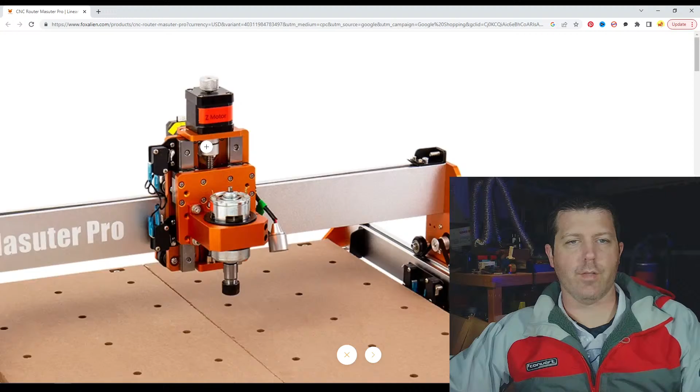So on this one here, let's see if I can zoom in. There we go. This spindle mount it comes with is for the same spindle that's in the 3018 by default, that same 60 watt 775 motor spindle. It includes that, and then you can also upgrade to a 300 watt spindle that fits right in here where this black sleeve is. Another option too is it comes with another clamp where you can mount a 65 millimeter router, like a Makita router, in there.

I think it shows it on one of these photos.

Yeah, so it includes that clamp with this kit, and of course this is a belt-driven system as opposed to the lead screw of your 3018. So it doesn't have quite the same amount of torque as a lead screw driven system, but it does have a faster speed, which is great for running a laser.

Yeah, so with that, the faster speed is more configured for a laser option as well. That's kind of the benefit of having a belt system, is that you can actually drive it a lot faster, especially when using a more high-powered laser. Now, the 3018 can still run a laser, but since you can't run it as fast, sometimes you have to run the laser at a lower speed to account for that.

So some other options along similar lines to that. Looking at the price tag here, that's $629. You can get a used X-Carve for double that, and it has larger stepper motors and a larger work area. So that's probably the other option I would go with besides this as your next step up from that. Now, FoxAlien does also sell...

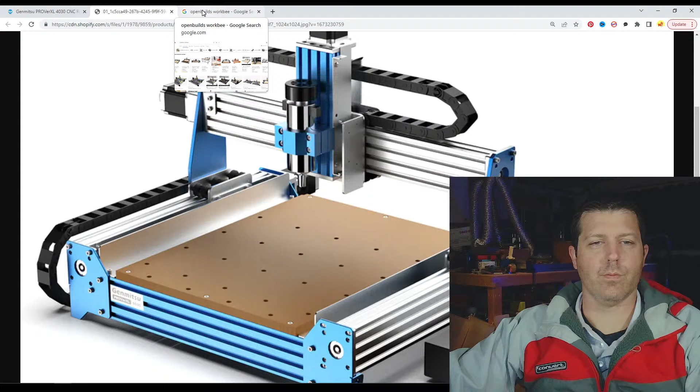X-Carve and this Shapeoko and the Long Mill. And those you can adjust the eccentric nut to pull the bottom V-wheel up into the rail as any of them wear, right?

So if we jump over here and look at the WorkBee... oops, let's try that one more time.

Over here on the WorkBee, it's a very similar design with the C-beam. Now, the thing that the WorkBee did differently in the original design, right, it's got the C-beam rotated to kind of cover up the lead screw naturally on the Y rails. But if we look at the Prover, they designed it with it rotated the wrong way so that the lead screw is kind of exposed to sawdust. So then they had to build these little channels here to help protect that.

And that's kind of one of the negatives that I don't like about the PROVerXL, is the way that these beams are rotated. Now, a neat thing I'm looking into is what it would take to give it away once I finish building it. Somebody sent me their old frame from the PROVerXL, and I've been slowly machining parts to rebuild it, to possibly give it away to somebody on one of these videos.

But that's still in the future right now. Yeah, somebody upgraded from the 4030 here to the 6060, and they just had a frame that's just sitting there that they have no use for, right?

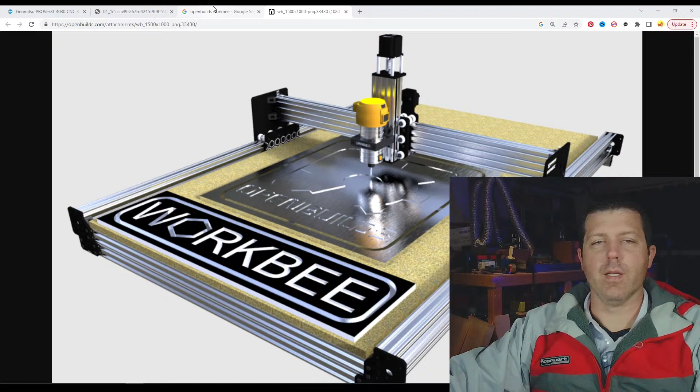So, I mean, that's a change that hopefully they make in the future, is just change the hole location there on that Masuter Pro. But yeah, they do have those.

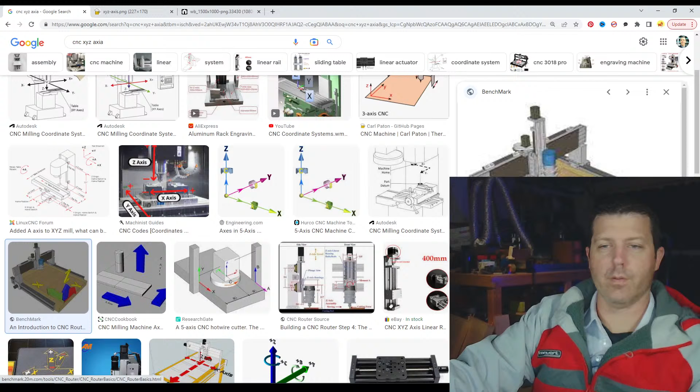So how we have X and Y here, the Bob's rotates that. So if we look at this, the Bob's is based on kind of an industrial CNC, which does use a rotated X and Y. Now on a larger industrial CNC you don't really have to worry about tiling, but a lot of times on the Bob's machines people will try to tile, and that doesn't mesh well. This is more industrial CNC, but the Bob's has this over on that corner with the positive X going this way and the Y going side to side. So if you try to tile using Easel's tile feature, it doesn't work with the Bob's.

And the problem with that, the bigger problem that I have, is that it's not hard to change. If you adjust it, you have to reflash the Grbl program onto the controller. So that's not hard to do, but he doesn't tell anybody that or how to do it. They keep it a secret of how to change it. And I don't think that part is right. So if people want to modify your product to make it better and you know exactly how to change it, why not just let them do what they want to do, you know?

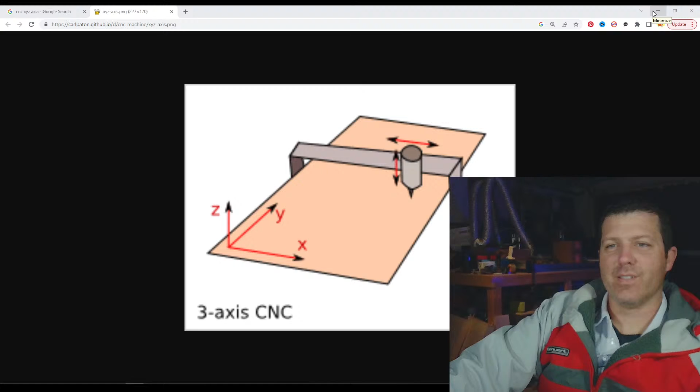Yeah Kevin, like I was saying earlier, I don't know if you caught that, but you're welcome for helping, but it's really my pleasure, man. I get so much joy out of helping other people succeed, you know? So yeah, it's my pleasure to offer the help that I do in those groups. It has become, I have taken on a little bit more than I can chew at times in those groups, but we'll jump into...

Actually we might have to go with Fusion 360 with the project that I was looking at doing. All right, here we'll go through some more questions real fast.

Roy, newbie to CNC, got a 3018 about 3 weeks ago, slowly getting to grips. It'd be nice if there was a video showing how to design something simple from CAD to CAM to G-code, with free software, that's the troubling part right there, right? So most of the free software out there is not really the best, but the best place that I suggest new users start really is Easel by far.

So you can't really get any easier than the way that Easel has it set up. And yes, they do have a paid subscription model, but they also offer the basic stuff. Although it's hard to say that VBits aren't basic, right?

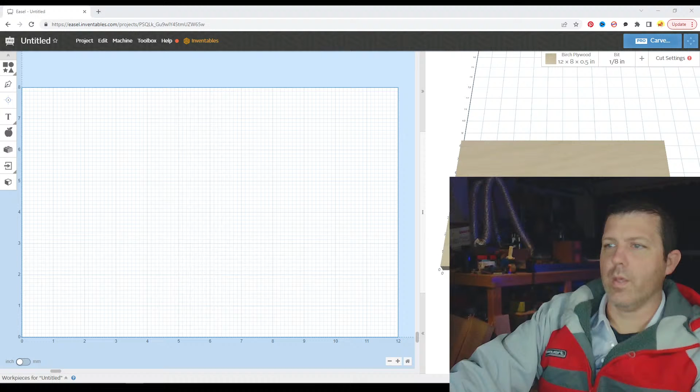Yeah, so tiling in Fusion gets a little tricky because you kind of set up the toolpath for yourself, and sometimes add dividing lines to your design in order to do it that way. But I think there's some older Popos Workshop videos that show how to manually tile before Easel released their built-in tiling method, and you basically just replicate that over in Fusion, and that's how you do it.

And it's really by taking your design, here we'll throw something out here, right? Taking your design and then kind of splitting it by throwing a dividing line through it, and then using that line to cut your design in half.

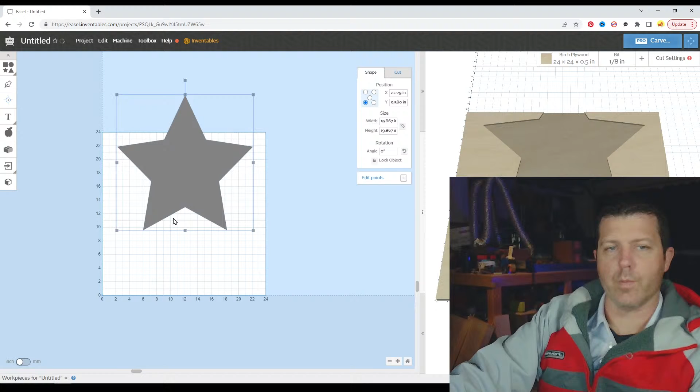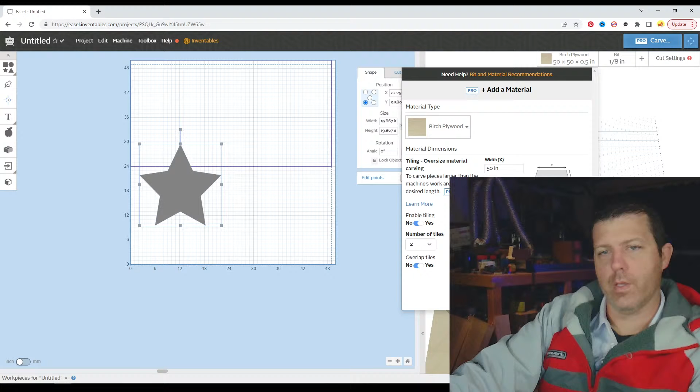Now the way that Easel does tiling by default, it actually uses some overlaps. So we can turn on tiling here... oh, we can't until I make it bigger. There we go. And it uses these overlaps, right? So it has about an inch, I'm going to say an inch, might be half an inch overlap on each of the tiles as it creates them. Yeah, 24, 25, and 26, right? So we end up with a 1 inch overlap in the middle there.

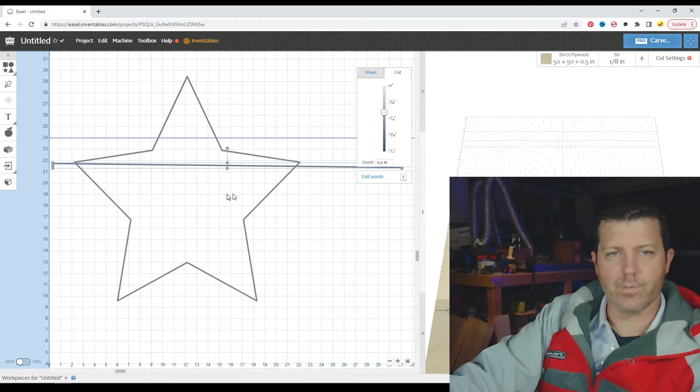You have to replicate that overlap within Fusion 360 by adding a line to your design and cutting through it. I can't really show that here because Easel doesn't support lines cutting through stuff, but over in Fusion 360 you can do that, then use the move tool to move your line up or down 1 inch, and that'll be your overlap point. You'd use that line to cut your design in half.

I can see if I can open Fusion 360, but I'm not sure how well that's going to work with the live stream going from the same computer. At least I'm not carving from it this time. I tried carving from the same computer as the live stream before, and that did not end well - too much RAM being used. I have since upgraded the RAM on this computer, but we'll give that a shot some other day.

Billy, there's a lot of people that do offer their help. The thing is, I end up in just about every group because a lot of the problems really replicate on every CNC no matter what you get. It's kind of fun when people join these groups and see people complaining and want to tuck tail and run away from that brand. But when you look at another brand, it's the exact same problems. If you think about each brand's power within the market, how many systems they're selling, and how many people post about these common problems, it's the same percentage of new owners that run into the same issues on just about every CNC.

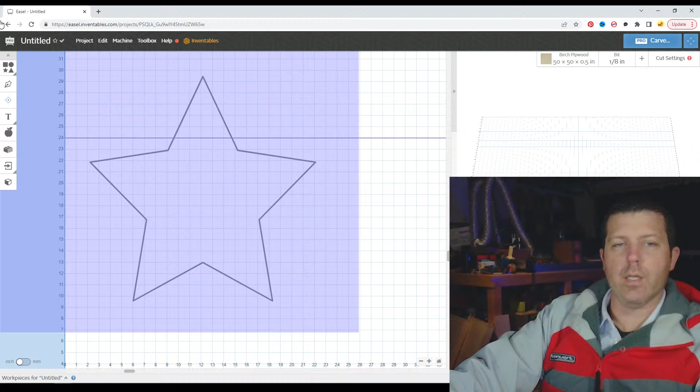Carveco is cheap, inexpensive - at $15 a month it's pretty good, cheaper than Easel. Carveco's lowest tier, Maker, doesn't have tiling built in. There's a lot of features not necessarily built into it. Well, now Easel can too, but before that, Carveco could do 3D carving, though it can't do tiling natively - you still have to do this line trick and cut your stuff up and tile it manually.

Let's delete this out. Actually, I didn't mean to hit that button again. Oh look, I have a lovely Google Chrome update. Hopefully I don't have any problems with this today. We'll undo this back to where it was.

What is your retirement present you're working on, Roy? Or that was a retirement present to you, the 3018? That's pretty fun.

Yeah, so I actually worked for a company that made remote control submarines for private and military use, and that's when I bought my 3018 CNC because we were outsourcing a lot of our parts to CNC shops. I wanted to teach myself how to do it and potentially make parts for them to undercut these other CNC shops we used. That, of course, didn't happen with the 3018, and most of the parts they were making were acetal and aluminum, which I've never really gotten into milling too much, besides a few small keychains and stuff.

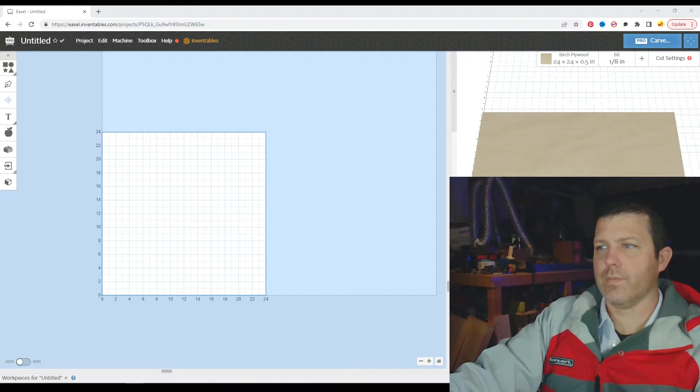Yeah, so Joe, it's really about - let me tell you a trick, since you're already here, about what I do when tiling. I've never actually tiled myself, but people have taken this advice and it works out very well because I've seen other people have problems with this particular issue. When you go to do the tile, you've got your X and Y zero down here.

Easel automates it a bit for you, but you'll have to do the same thing using Fusion 360. I would put a sacrificial board along your y-axis, like a piece of MDF, and clamp it down or screw it down so it's solid in place and not moving, then use the CNC itself to mill a flat edge on this face, where the workpiece is going to butt up against.

So then you've got a flat edge that's perfectly parallel to your y-axis, and you can butt your workpiece up against it. Then you come down here, and when you set X and Y zeros, you can jog your bit over a little bit and apply a piece of blue tape or mark it with a pencil exactly where your 0,0 spot is. So you do your first carve, and you need to slide it down 20 inches to that 20-inch point of your workpiece, which becomes 0.

So how do you identify 20 inches? You could measure with a tape measure, but what if your tape measure isn't the same calibration as your CNC? Your CNC isn't calibrated to that exact tape measure. So instead, I would jog the CNC down 20 inches, and now where that bit's at is the 20-inch point. Mark the workpiece right there, apply a piece of blue tape or mark it with a pencil, something you can erase, and you've got your distance perfect.

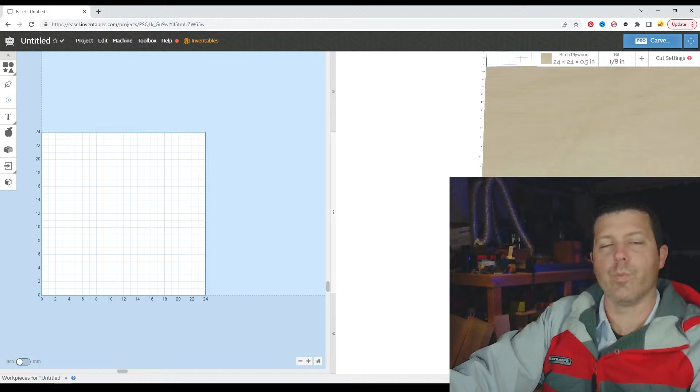Then you slide that marked point down to the 0 point of that side board you've got there, and that's going to give you the perfect alignment for sliding your workpiece down. That's really what I would do for tiling to make sure the alignment is right, because that's what most people manage to mess up on.

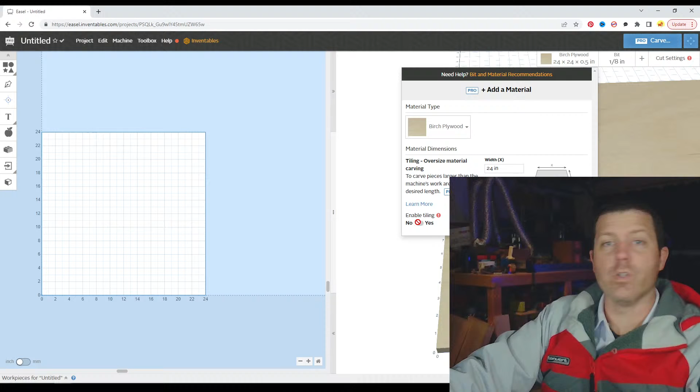Now the other thing is, depending on what you're carving with the tiling, you can set the different tiling amounts in here, the different lengths. So even if tiling wants to do just 2 tiles, you could make it do 3, 4, or 5.

Because that is one good way to end up with alignment issues that are visible.

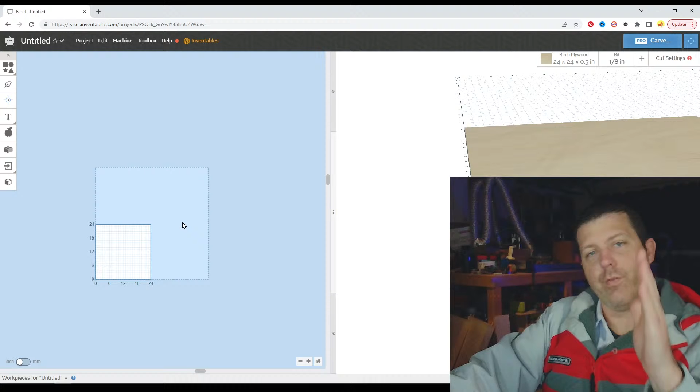Whereas if your alignment and sliding was slightly off, and you split the letters so the gap falls in the dividing piece of the tile, nobody's really going to notice that it was 1/8 of an inch off. But if you're 1/8 of an inch off in the middle of a letter, especially one that's not perfectly vertical, like a V or something with an angle to it, and your tile is off, it's going to cause it not to align right.

Hey, what are you doing up, James? Isn't it like what time is it there, 8 o'clock at night? Oh, I guess there's 2 of you here from the UK, right, James and Craig.

Yeah, exactly, use the CNC itself to mark the points.

9 o'clock, that's what, 21:30, that's, yeah, 9:30. My timing wasn't too off, my guess there.

Yeah, so exactly, Craig, using the CNC itself at least to do the measurement, maybe not to actually mark the board with the bit, but at least to give you the alignment point.

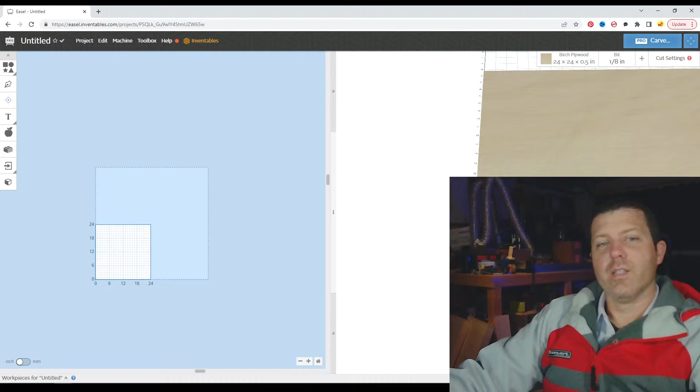Oh, that's neat to replicate the house they're living in for a dollhouse. Seems like a bit of work to do, and all the furniture too. Yeah, that's a lot of work. You'll have fun doing that while you're retired, right? Finland, oh my gosh. So yeah, I actually kind of work your guys' hours. I am coming up home and taking my kids to school in the morning, and then here I am now. Well, they're all at school.

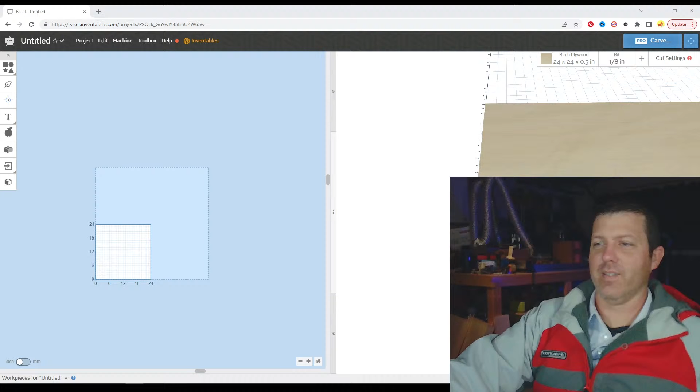Let's go ahead and see if we can pull up Fusion 360 without crashing this computer. I didn't realize that half of that stuff I was trying to show you was actually covered up by my photo too. I'm sorry about that, guys. Hopefully you understood what I was saying.

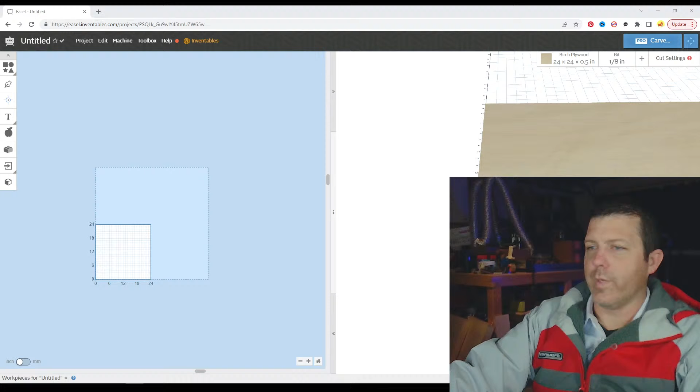Oh, inlays, that's the other thing. So Craig, we were talking a little bit about, I use Easel a lot because it's easy to use and it's easy for other people to grasp, right? Brand new users really grasp onto it. But one of the things that it lacks is being able to do V-bit inlays.

We'll do it there so I know that you can see what I can see. Oh, there we go, that might work better.

So Carveco can do V-bit inlays a lot more easily. Now it does still take a few tricks to get it to work right in Carveco, but over in the Carveco group we've got a handful of people that are really knowledgeable about that. Let's change that over like that.

And we'll see if Fusion 360 loads up. Still taking a minute to think about it. Luckily I have an educator's license too in Fusion 360 still, so there's a few extra features that I have in there. I'll have to make sure that if I show you guys anything, that they're part of the free version too.

Sitting down with a drink. You drinking beer? Man, I haven't had a beer in like 5 years probably. Not that there's anything wrong with that, or that I had a problem to need to stop, but I just haven't had to. I managed to put on quite a few pounds during COVID, and now I've been hitting the gym trying to take care of that.

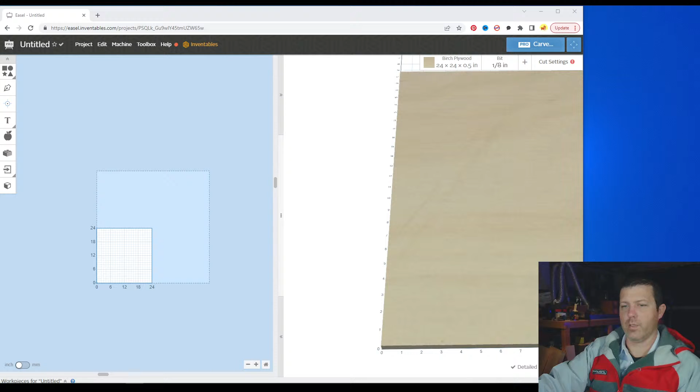Anyway, so beer wouldn't be helping me with that endeavor. So here we can jump into Fusion 360 and we can kind of talk about tiling real fast. Let's close that music out actually.

Oh, we can design from scratch, I guess. But have you used Fusion before at all? I can kind of show you what's going on there. One of the first things that I suggest doing, hey Timber, is over in the CAM software we need to set up a machine. You don't necessarily have to do it, but it does save one critical step. If you don't, you have to modify your G code afterwards depending on what sender you're using, because it'll have a tool change built in. So I like to set up a custom machine in there.

So you've never used Fusion 360, so we can come in here and create a sketch, that's the first thing really. It's kind of laid out that you use these modules here top to bottom, and typically you work left to right along the top here. I suggest that you check out Lars Christensen on YouTube.

He's got great videos, although he hasn't produced any in about a year and a half. He's on the Fusion 360 team over at Autodesk, and was for years. I guess at some point he transferred to a different department and stopped making the videos, but then he transferred back, made them for a couple months, and then stopped again. So I don't really know. Maybe it's something to do with their business there that they don't want him doing it on his own account.

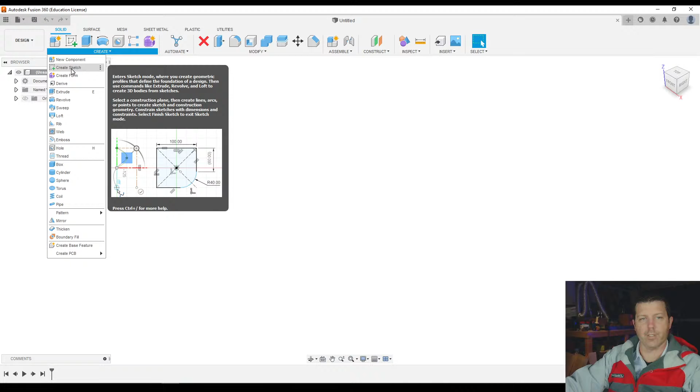But his videos are still, even though they're a couple of years old, very applicable. So we come over here and we can create a sketch using this little button, or go to create a new sketch. There are all these other options down here, but we're working from the top left, down and to the right. So you basically create a sketch, choose which plane you want it on, and this plane selection correlates to this square as well. Since in CNC we usually carve from the top down, I'm going to select that bottom plane, which rotated our box, and now we're looking at our board from the top down.

I'm going to scan through this real quick. I'm not actually going to design something with you because I'm a little tight on time, but I'll go through a few things here.

So you get in this sketch area and you can decide what your document settings are going to be, whether they're metric or imperial. A lot of this stuff you can double click on, or there's a pop out with intuitive things where options pop up with explanations of what they are. And you select what unit you want to use here.

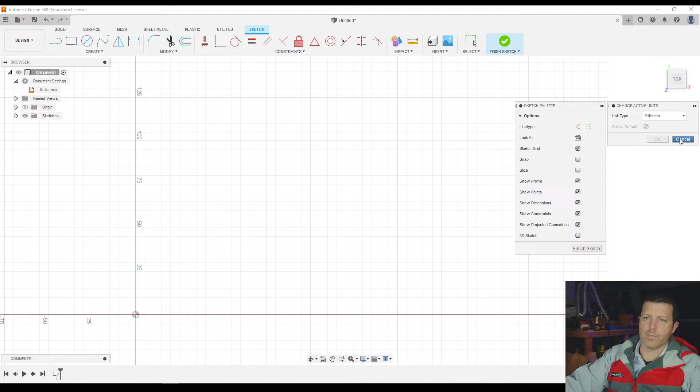Let's work in millimeters. And I'm going to throw a rectangle in just for fun. When we do that, it pops up with the dimensions and we can type something in. So we have a 200 by 50 millimeter rectangle already.

Let's say I know what the dimension is in imperial though. You can easily do your math in here. So we know imperial is a 25.4 multiplier, so we do 25.4 times 2, and that's 2 inches, aka 50.8 millimeters. You can do a multiplier directly inside there, which is kind of neat that you can do that within that tool. Once you do, you can go ahead and sketch stuff out here.

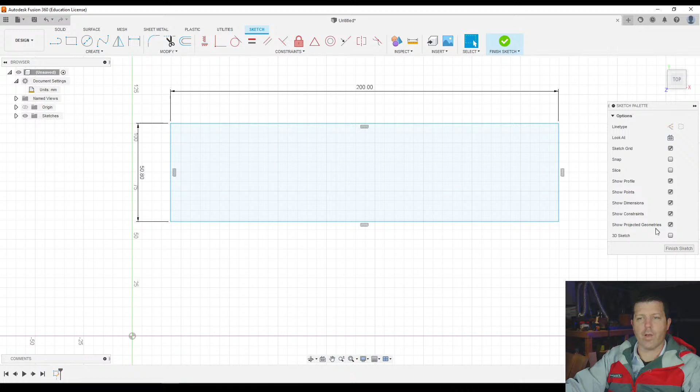I'm going to finish this sketch and we'll move on to the next step. For the most part, a lot of CNC work, if you're making signs and whatnot, you can just make a two-dimensional sketch and then carve using the perimeter. I can drop this into the manufacturing tool and create a tool path around the outside to cut this rectangle out.

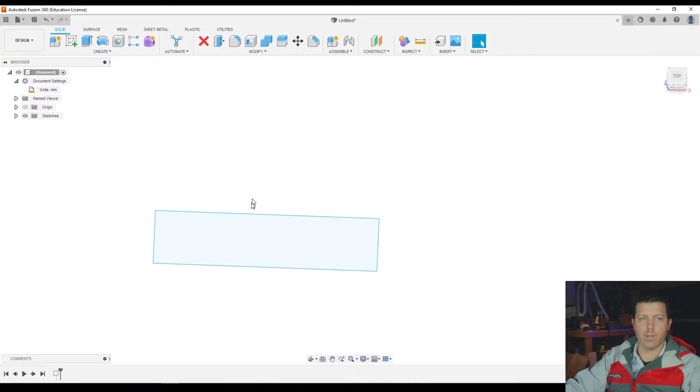Or you can make it an actual 3D model by selecting the face now and extruding it. You can grab it and move it up, or you can type in the dimensions. So this is 18 millimeter thick wood that we're going to cut here. You can give it that dimension, but you don't have to, again, unless you're designing something that really needs to be 3D.

All right, take care, James. Thanks for checking in, I appreciate it.

Let's go over here and grab one of my previous designs, and we'll pull that in real fast. Ooh, maybe we can't. Let's see here.

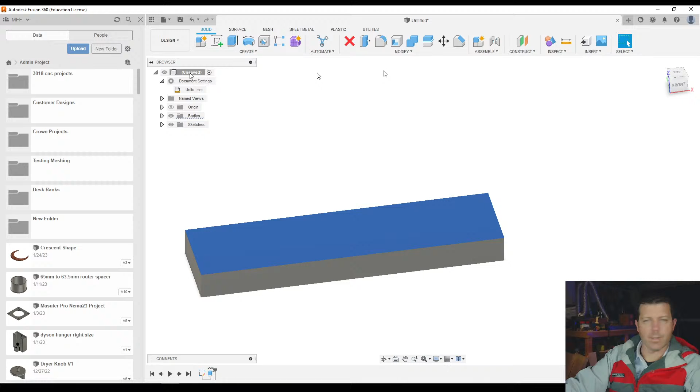So there's some designs in here that are actually work related, so I'm going to pull it over to a different window real quick and pull this in. All right, it's coming up now.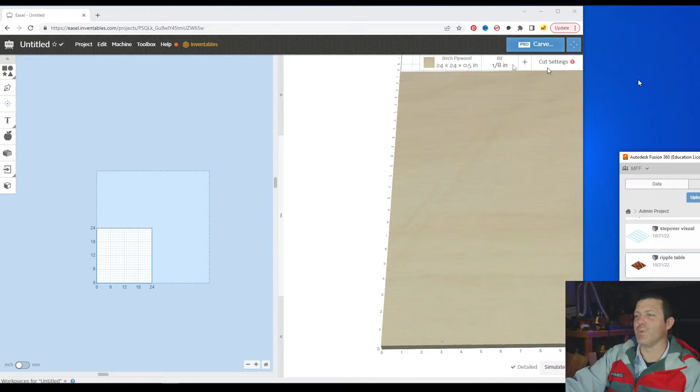Using some of the lofting tools that are within the 3D module in here, which are a little bit more advanced techniques than the tools that are in there. But the Fusion 360 group is really great as well. There's a guy in there who calls himself Swami, who helps a ton of people. I would say that he is the Fusion 360 version of what I try to do for Easel users.

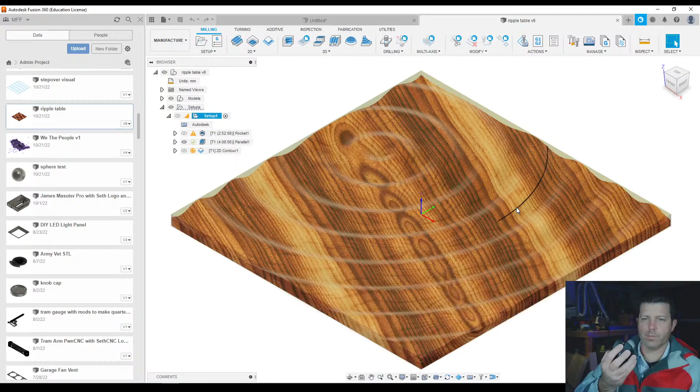And again, using your mouse here, I'm using the scroll wheel of the mouse and rolling the wheel in and out, and you can just easily zoom. And then using the shift button and mouse clicking with the center of the mouse, I'm pressing shift, then clicking the mouse wheel and dragging it around, and you can rotate the model very easily.

Now if you don't know these hotkeys, the other way to do that is called orbit. You'd have to go in here and click that in order to do it. And in order to zoom in and out, you have to use the magnifying glass here. So that can get annoying doing all these extra clicks, so using the mouse to do this sort of stuff makes it go a lot faster.

And it is extremely similar to the way that you can move the 3D preview around over an Easel too. So this is a ripple effect table, so of course this had to be done more three-dimensionally. In order to carve this, it's going to be very similar to, almost identical to carving the STL over an Easel, if you haven't seen that.

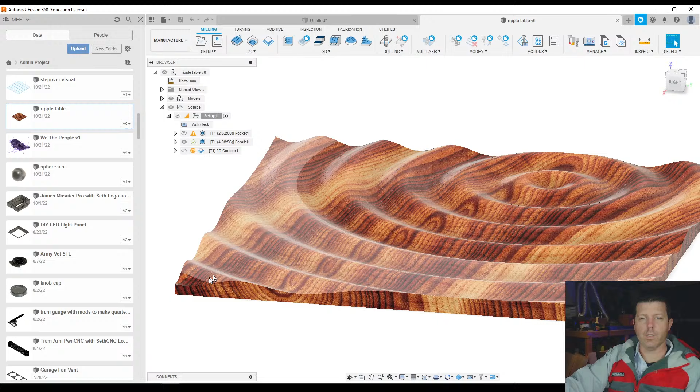I've also got a video showing how to carve STLs in Fusion 360, and that's basically the same approach I'm going to use to carve this. It's basically a sine wave sliced through this, using that as a center point and working its way out, then rotating it around that center point.

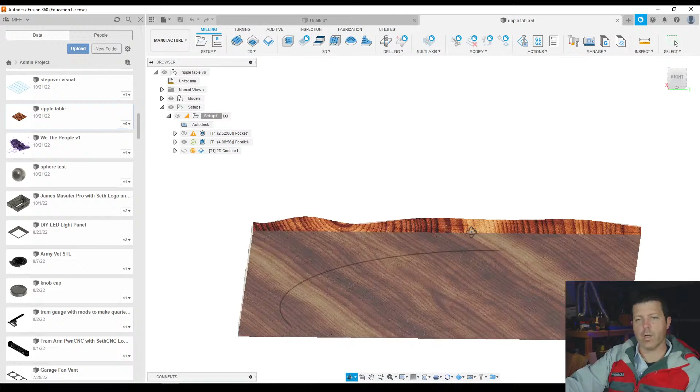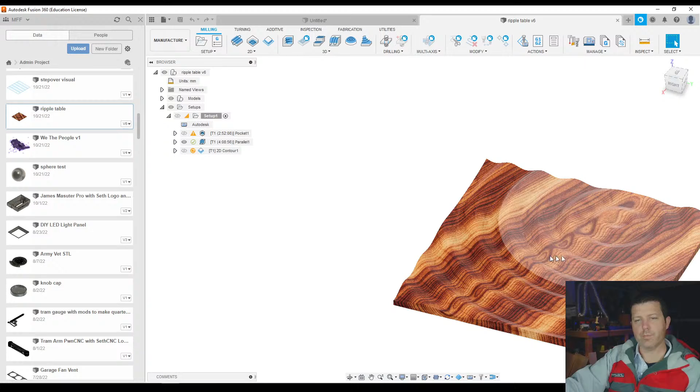Once I carve it, since I made it a sine wave, the tops are all the same height, and I can put a piece of glass right on top, maybe with a few rubber feet on some high points near the edges to keep the glass from moving. The idea is when I cut it, I made sure there were no super high points at the corners so they don't break off during the carve.

Anyway, we can go to a different design too real fast.

I've got another video that walks you through how to make a very basic sign in Fusion 360 and also do the toolpaths. In that one, to make it look and make a bit more sense, once you have the sketch made, you can extrude it to different thicknesses. I went ahead and extruded it in that video before making the toolpaths, which does help with that situation.

That video also talks about how to do the machine setup, because if you don't set up a machine, when you save the G-code it has a line for an automatic tool changer. But most of us don't have one, unless your machine is more than $15,000 to $20,000, you're probably not rocking an automatic tool changer. Except for that one guy in the SethCNC group, he's got one on his 3018, which is pretty neat.

Let's see if I can find another model here to bring in that.

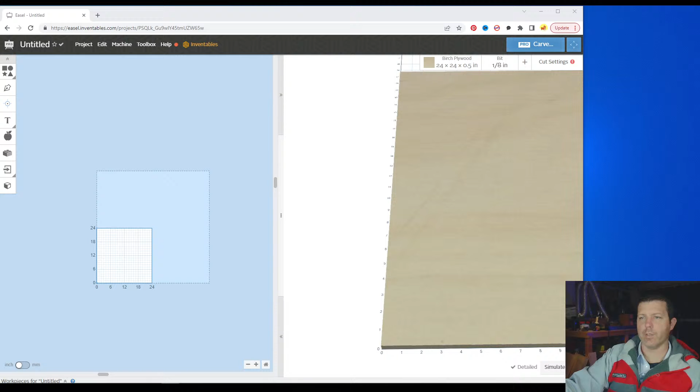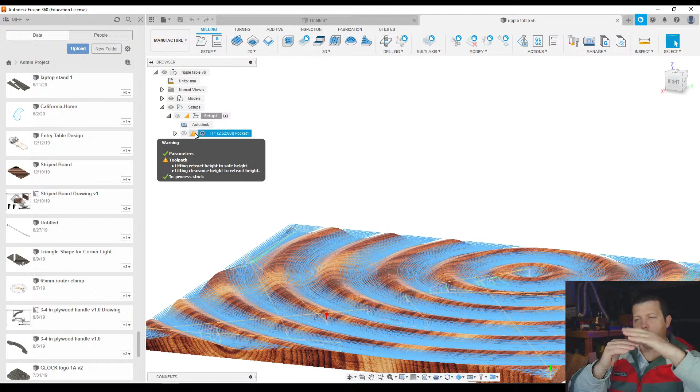I set them up wrong in this toolpath. Basically your safe height needs to be here, and your retract height and safe height and clearance height need to be on certain levels. If I didn't type them in right, it gives you a warning, but it offers to fix it for you and proceeds out.

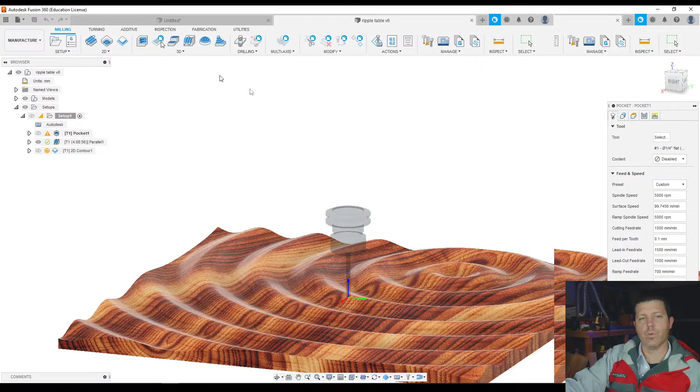There are other times where you get a red exclamation point and it fails to calculate. So if you were to go through all these steps for setting up the toolpaths, assigning the tool, setting everything up, changing a bunch of settings, then press OK, and it fails - how do you know which one you changed that caused it to fail?

So I like to open it up, assign a tool, especially in the beginning, press OK, and let it calculate without an issue. Go through tab by tab, change a few things as you learn what the different settings mean, and as you make one, two, or three changes, click OK and let it calculate out. That way you can find where the fault is if you end up changing something that caused a conflict, a failure to calculate because you put the wrong values in.

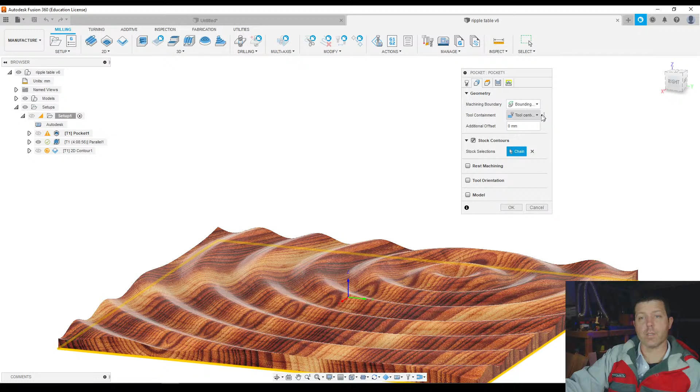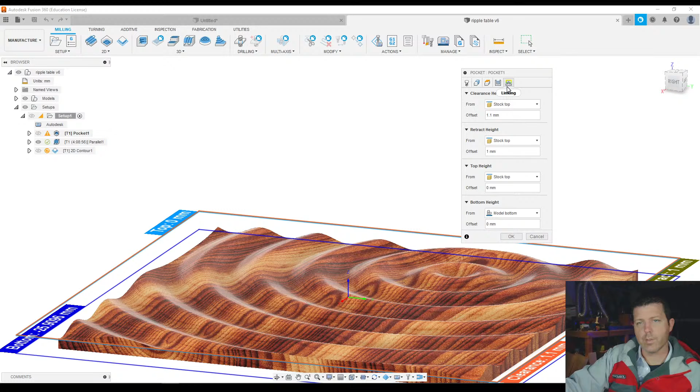Where are we at here for heights? What was the warning? Lifting retract to safe, and lifting clearance to retract. So clearance needs to be as high as... I think the safe height is over here, right under safe distance, 2.2. So the retract needs to be at least the same as that.

So if I do... why does it not like that? Here, I hover over it and it tells me: warning, safe distance is not greater than the maximum step down. So it wants my safe distance to be more than the step down that's set for the ramping here.

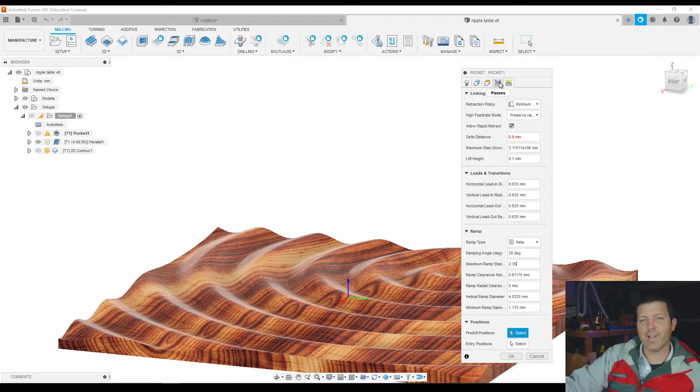Think that'll fix it. That might be the wrong step down that it's referring to though. You'd have to go through, and I forget where the others do. Let's see if we can find it real fast. Step over, diameter, step over, max roughing step down. There we go.

I kind of wanted it at 0.3 though, right? What it was a second ago. At that 2.35, yeah. So we can go ahead and change the safe height to be greater than that, and then also change the rest of those as well, right? So we've got 2.2. We'll just change the retract height to be 2.2, and then the stock top just needs to be equal or greater than that.

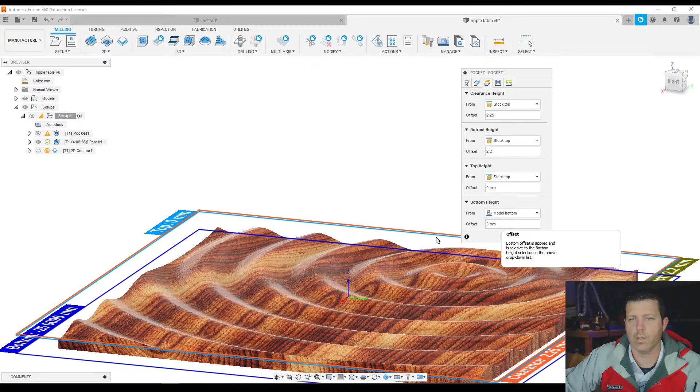And now that warning should go away. Oh yeah, that model was generated like a month ago, and Fusion has updated since then. So we got a warning there. Anyway,

Yeah, you got to get up at 4:30, and it's already 9, right? So yeah, take care, have a good night, man. I appreciate you stopping by as well, you know? I actually have about 10 minutes left too before I have to get out of here. So we'll wrap this up with this.

And a few other things that I do have on the list over there to go over very soon is V-bit inlays. So maybe we'll save V-bit inlays for next week, and I'll rock through a V-bit inlay using Carveco, and we'll just do the computer setup on here for that.

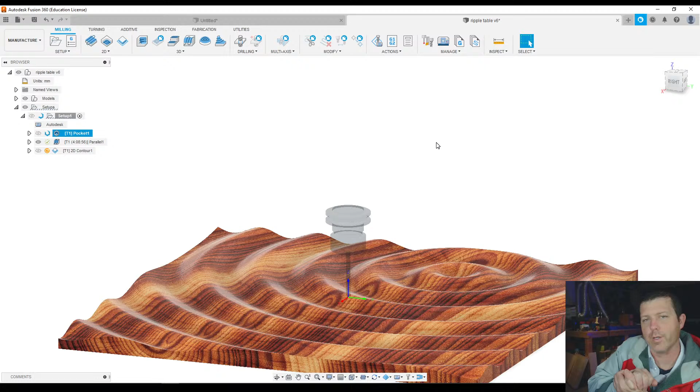Timber, yeah, so the sine wave, I did design in Fusion 360. Oh yeah, we can jump into that real fast.

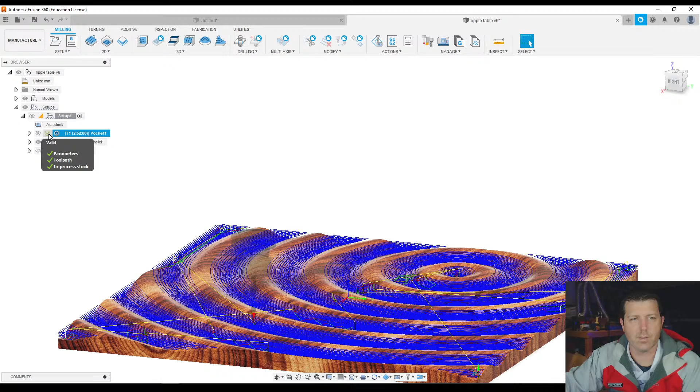So yeah, you can see here that everything is all checked off now. I fixed that toolpath and the layers, right? So we can jump over here, back over the design tool, and like I said, I've got a few more minutes before I've got to go get more kids, so we can jump into that real fast. We'll hide the body and sketch one, yeah.

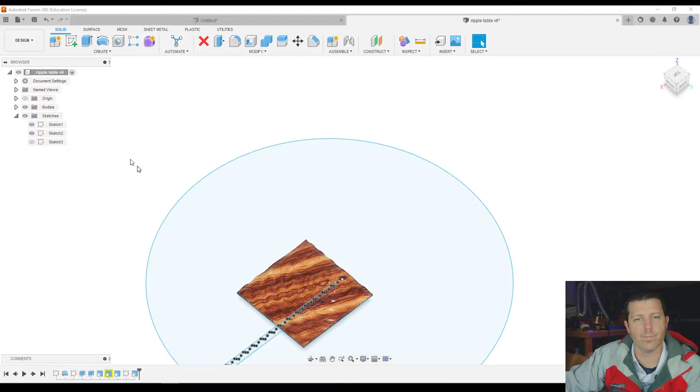So I just used an arc sequence here to design a sine wave. And then I did the bottom half of the table and the top part that I was going to cut away of the table, and then I rotated it. Rotated that sine wave about this circle to give me the... might be hard to see with the way that this wood is sitting there, but you can see this center point there, which is the edge of this rectangle, that I rotated it about that center point to create the radius, right? The ripple effect.

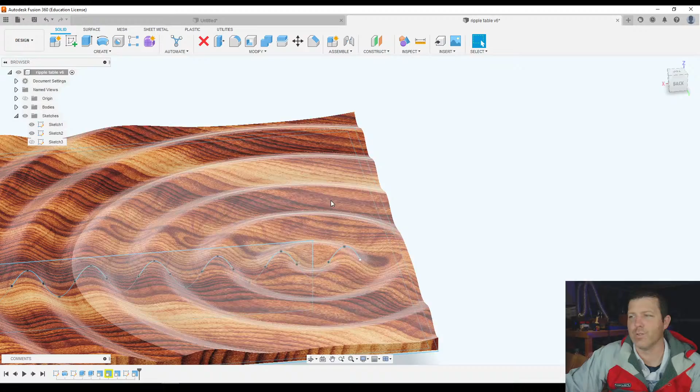I was considering also doing another carve that sits on top of the table of like a water droplet falling into the water, which I haven't really ironed out exactly what I want to take this project to, but that's basically how I did it. I made this ripple effect using an arc, a repeating arc.

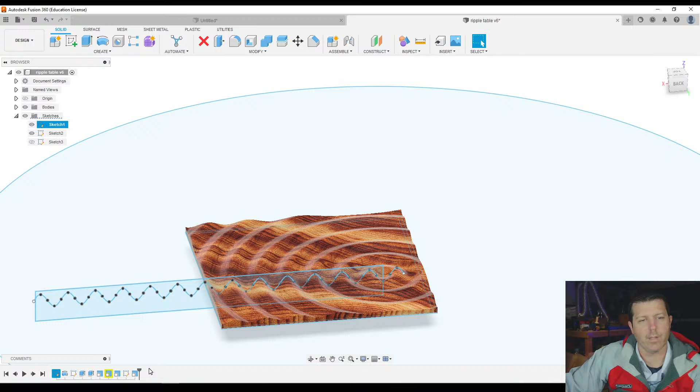And I want to say it was, let me jump in here real fast. And we can jump back to this part of the timeline. Ooh, now you're gonna make me figure out how I did it to begin with, because there's a few ways to do this, but I want to say that within this sketch tool, we'll just create a new sketch to do this.

Oh, I need to select my plane there. That's what the model's in the way. I didn't even notice that.

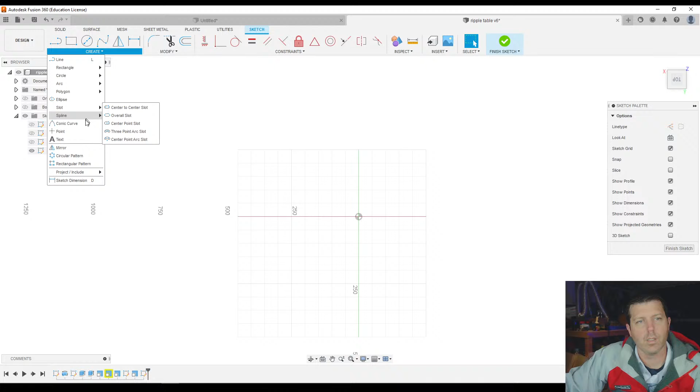And in order to do that ripple effect, we'll just hide the rest of these real fast. So you could use this fit point spline. I believe that I used one of these. Yeah, I used a conic curve, and then, oh no, yeah, fit point spline. And I used a known location here, like zeros, went through and made another point, and

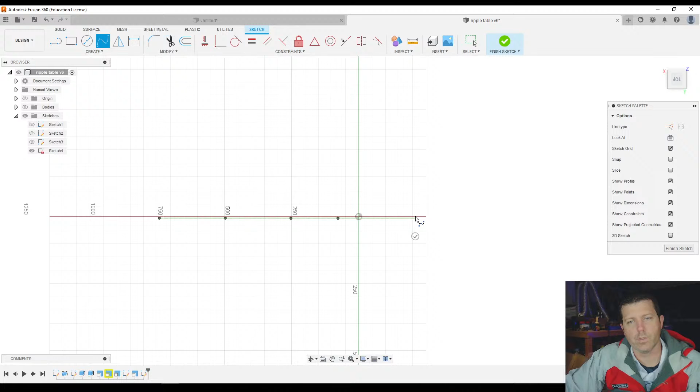without pressing escape this time. And separate them out a certain distance, right? For the sine wave, they're going to be equidistant apart anyway, right? So once you set those distances, you could then take your wave here and adjust it up or down.

I'm going to go ahead and press delete on these to get rid of that part. And I spaced out the points like that to give me the sine, all perfectly spaced out, just by grabbing one and lifting it the exact same distance as the other one over here.

Now it does something with the way this is set up with the first and last node. You see here the arc amount is different than the arc amount here. It has to do with the way it wants to throw these in there. So if you look at the original design, I kind of left the first one, and the last one ended up good. But for some reason it messed up the first one, and I threw that one away basically, if you look at it.

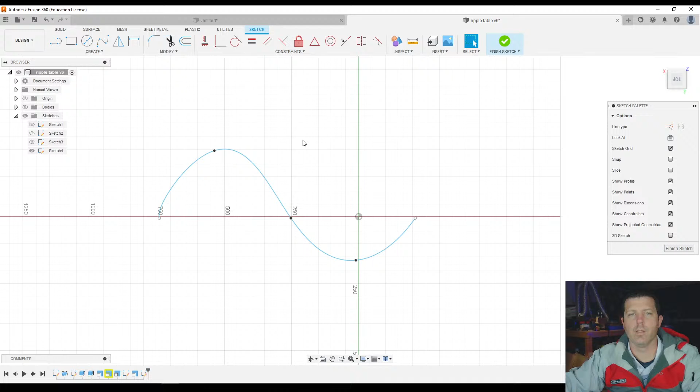The ripples could cross each other, that'd be like having two different duplicates of the same thing with two different cutaways. Yeah, that'd be pretty neat.

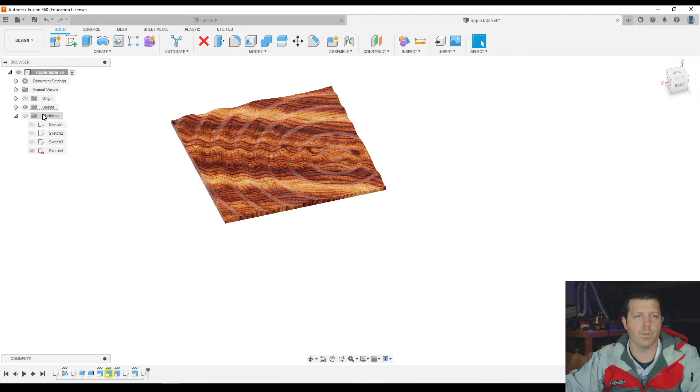Here, we'll jump back over there real fast. Because even then, once the body's done now, right, we can actually just use the body itself to create - like I could rotate, I could duplicate this and move it over, and then use a body to cut the other body. We'll do that real fast.

Let's see if I can kind of get what I think you're suggesting doing, right? I'll paste a new body right there, and we're going to move it. Oh, it's the same size, so all I can really do is rotate it.

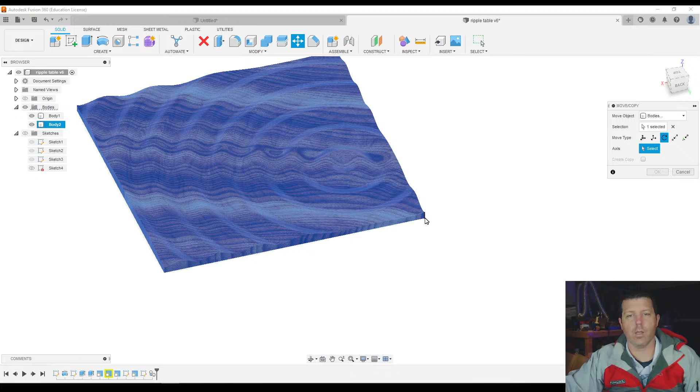We'll rotate it about this axis. I don't know. Yeah, let's go the full 180. And then we'll move point to point, that bottom corner to that corner.

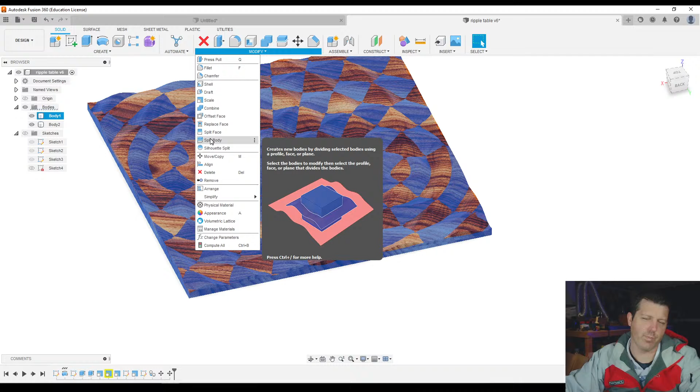And now it kind of forms like a weird checkerboard-ish pattern, right? So I could take this body and then use this - not combine. It is split body, yeah. Or is it combine? Now you guys are making me forget how to do this stuff. Yeah, combine, but we use the cut operation, and our second tool body is this other body.

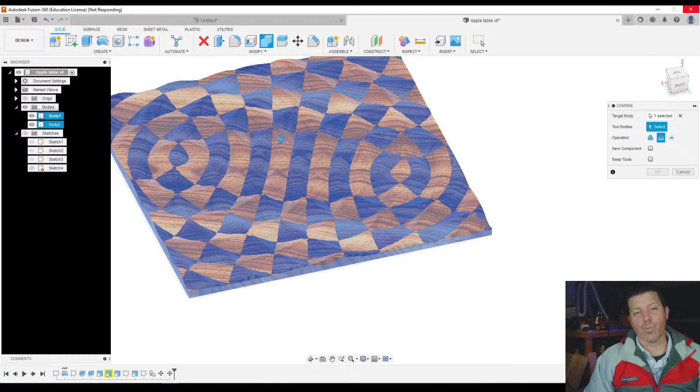It's going to take a second to select it and do its math here, because it's going to want to preview it too right now. Ooh, we'll see if that just forced Fusion to crash. All right, we're good. And we can use that tool to cut it with, right?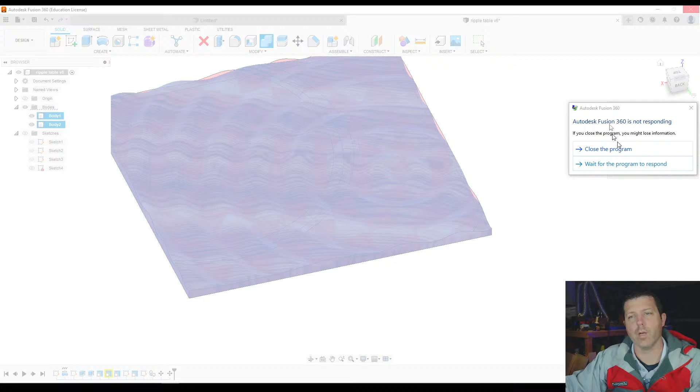Oh, it's not letting me do that. Keep tools, new component. Oh, I'd have to actually invert it and make it like the top of this in order to cut it away. That's the problem. Oh yeah, look, I gave it too much stuff to do there, didn't I?

It looks like I got a pop-up there that Fusion wants to crash, but then it didn't crash, so that's good.

Yeah, so I think the better way to do it is to make a top portion and then use that to cut into it, right? And that would give us the effect you were talking about. Instead of rotating the bottom, if I made another top and cut it away, that would work.

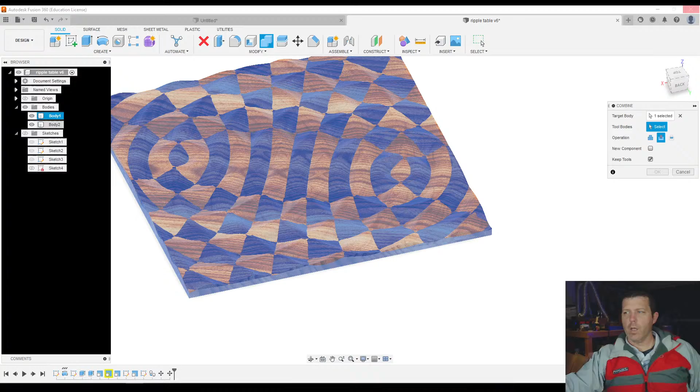Oh well, it's been - but I mean, even that looks really weird, doesn't it? The way that - so I think we've got like some wall art here with this one, right? They're like...

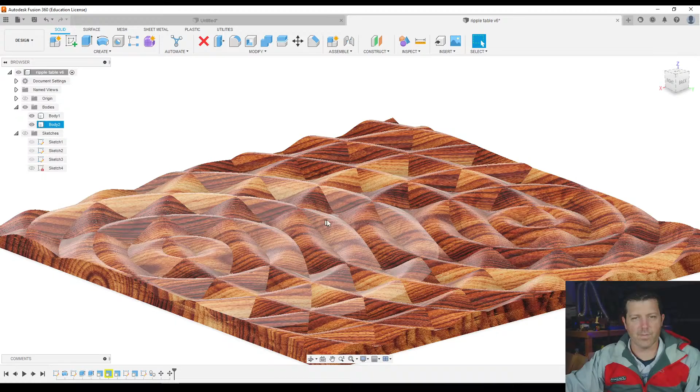Yeah, that did some weird stuff. Anyway. Huh.

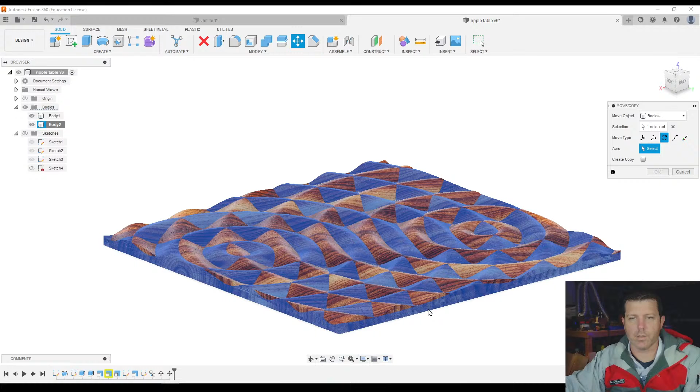Yeah, let me, now I want to mess with that again. Let's try - oh, we want to move, right? M for move, and we're going to rotate it again. Select an axis. Oh, we'll do this whole side here. Why not?

Going to put, yeah, let's put that point on that point, maybe. I don't think it's going to come out the way you want it to, though, but it'll be interesting. We'll slide it up a little tiny bit.

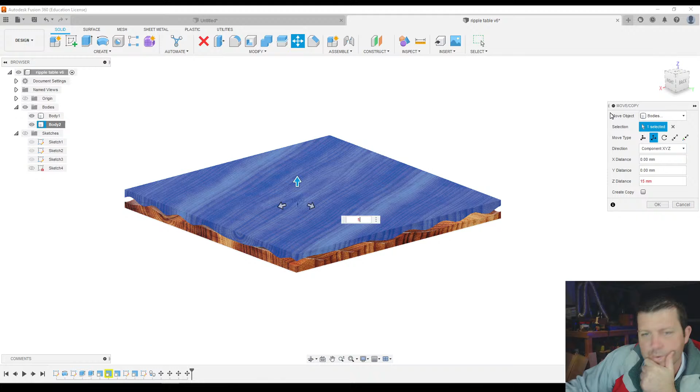Yeah, and then now I can use this body to cut away the face of that body. It's going to be kind of trippy. But we do combine, select cut, and we're going to cut using the other body as the tool to cut it, right?

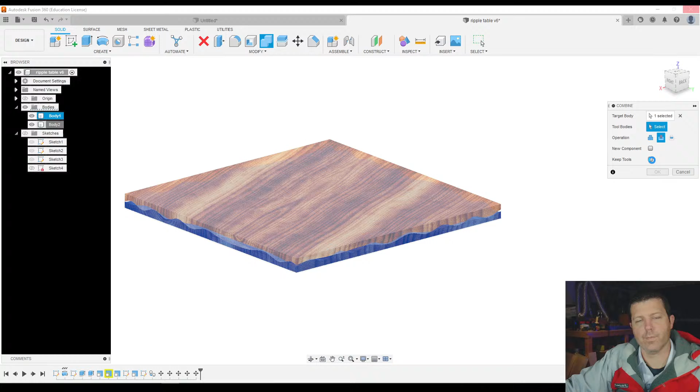See, it really, having Fusion cut a body with a body kind of confuses it. All right, so you can kind of see what the end result's going to be.

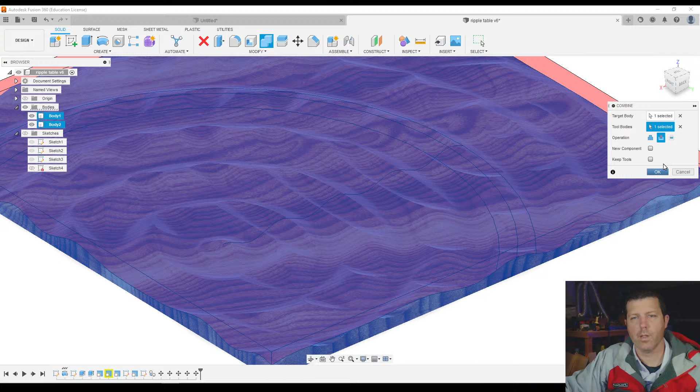I think it'd be, because of the way that the waves overlap, it'd be kind of more difficult to do the two different ripples hitting each other. Because you have to choose the wave point to make it then diverge away, right? So it'd be a little bit more difficult in the way that I set it up.

But let's see if you can see that, if I can get a good angle with the lighting and stuff. But that did some weird stuff to it, right?

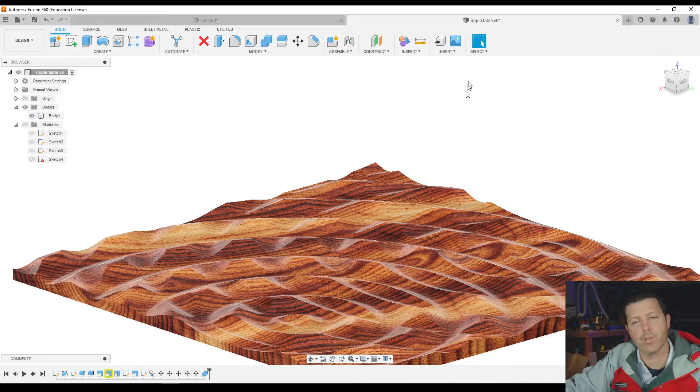Where it kind of cut the concentric circles out of the high points of the other concentric circles. So that's how you can kind of use a model as a negative to cut against. And I could have selected keep the tool, and it would have also kept that other body there, you know? So that's kind of how, when I design some stuff for some of the 3D printing stuff that I design, where I want a part to fit inside of another part.

You design the inner one first, and then you design the outer one. Let's say I had to thread something with an Acme thread - Fusion 360 has a threading tool, but it doesn't allow you to use the trapezoidal Acme threads that you have in lead screws. So there's no way to put a lead screw thread into a part in Fusion 360 using the threading function.

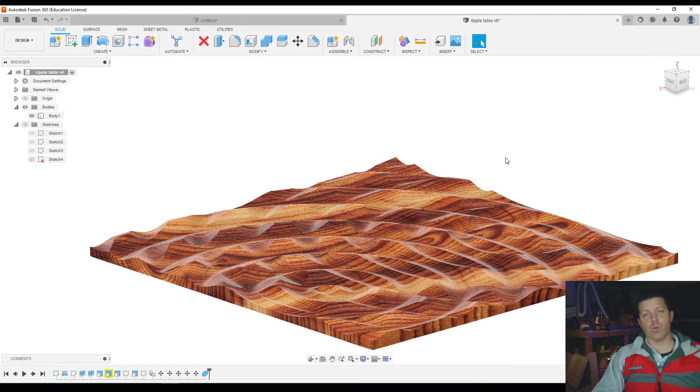But what you can do, and what I did, I went on Grainger and I downloaded the CAD model of the lead screw, and I threw that in there, and I used that same combine and cut away technique to make a void for your other model to fit into. That's how I made a nut block for one of the CNCs for the Z-axis - a custom 3D printed nut block out of that.

Anyway, I've overstayed my welcome here. Well, in my own garage. Maybe next time we'll be able to do more of a tour once I finish up some of those trays, because I know there's 2 sitting here, but there's actually 7 more right around the corner that need to be finished up too for orders as well.

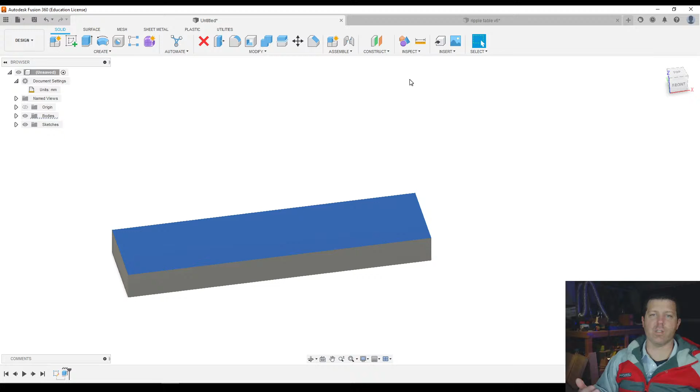But it's a lot of the stuff that happens for that is conceptual to V-Carve as well. You could kind of replicate it in Fusion 360 too for the V-bit inlays with a little bit of math. You can get Easel to do V-Carve inlays, but it takes some math and trickery of offsetting the design after you run it through their own inlay generator in order to get V-bits to work. And so I've already ran through the whole process of getting Easel to do a V-bit inlay, and I ended up doing a whole 2-hour long video that was half teaching about geometry and V-bit angles and how to do the math using different bits.

So I might revisit that Easel version, and we'll just stick with 1 or 2 angle bits. Maybe I could make an Excel calculator, that way you could automatically just type in your own bit angle, and it tells you what math to use for the offsets. But I ended up scrapping that video because it was just too long and math.